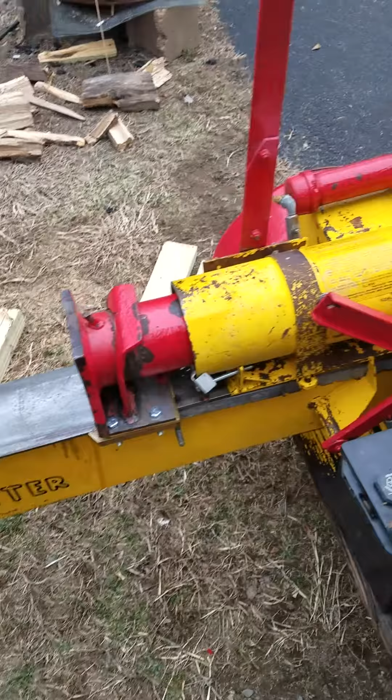A little bit of history. I bought mine 15 years ago from my uncle's best friend who passed away. His wife sold it to me for 50 bucks. We couldn't get it running at her house. I brought it home, it had a cracked spark plug. Put a new plug in, she started right up.

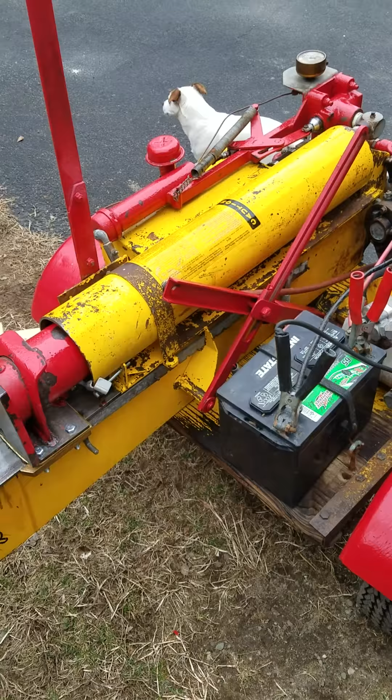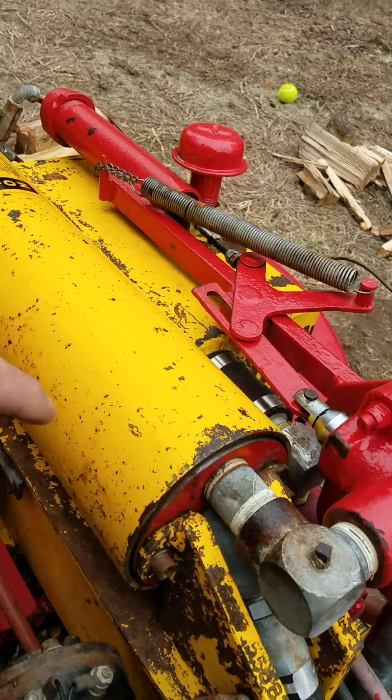Just a few things right off the bat. If you own one of these, take care of it. I started watching videos and Googling about this because I had these two guide bolts break, which in turn pushed my piston to the side and blew out the back O-ring right here. I had to make up new brackets and figure it all out and get it back together. But do your regular maintenance, take care of it. This ain't no throwaway splitter like you buy at Lowe's and Home Depot, use for a year or two and then throw away and buy something new.

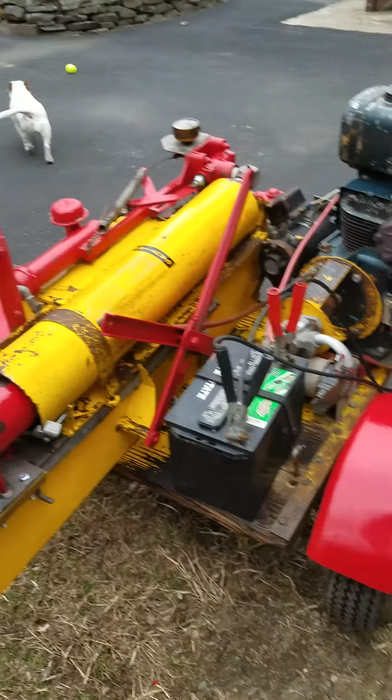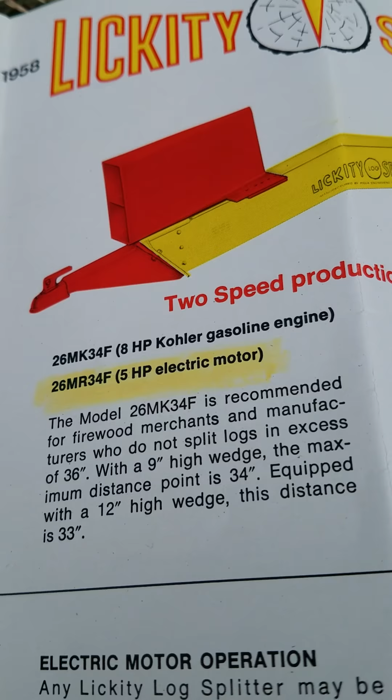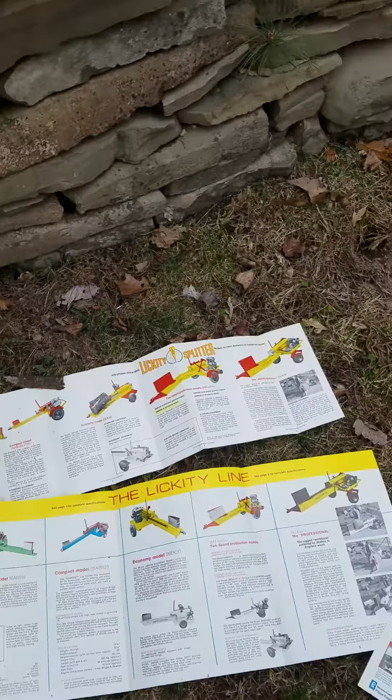This thing is from 1958. Mine, the badge on it says 26MR34F, with an electric motor. The guy I got it from, I knew him. He was a gearhead, grease monkey, he would never buy nothing electric. So why the badge says what it says, I don't know. But it should be MK34F, because that is the original Kohler motor.

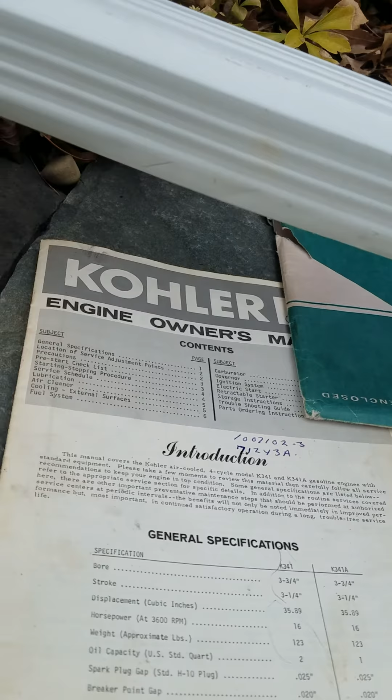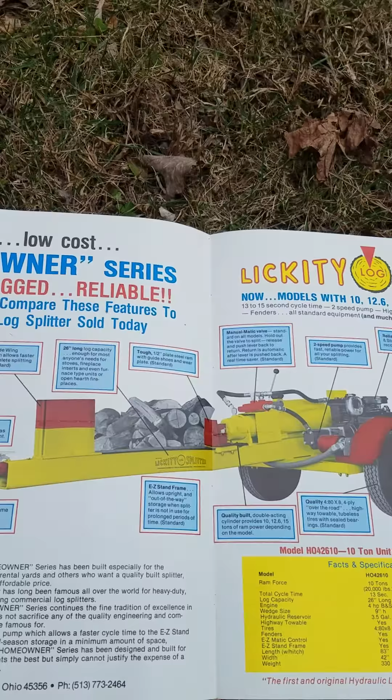I have all the paperwork the lady gave me, with the original Kohler owner's manuals. I got a ton of literature. American pickers would kill for this stuff - all vibrant colors of all the different splitters, with descriptions of them all.

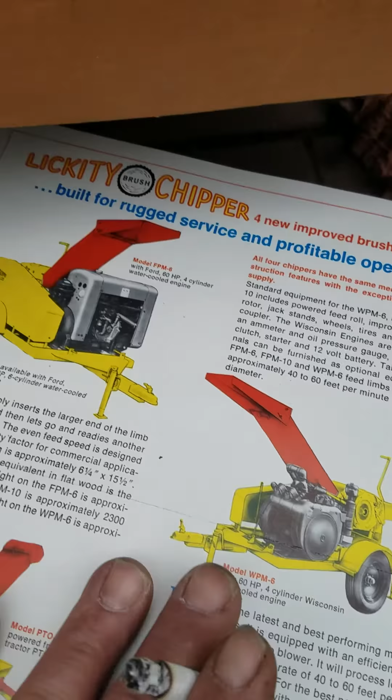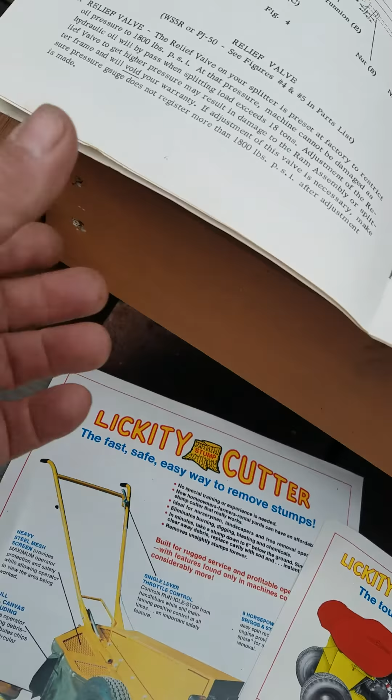Lickity also made other things such as chippers, chipsters they called them, and cutters. I also got manuals with it, tells you everything you need to know.

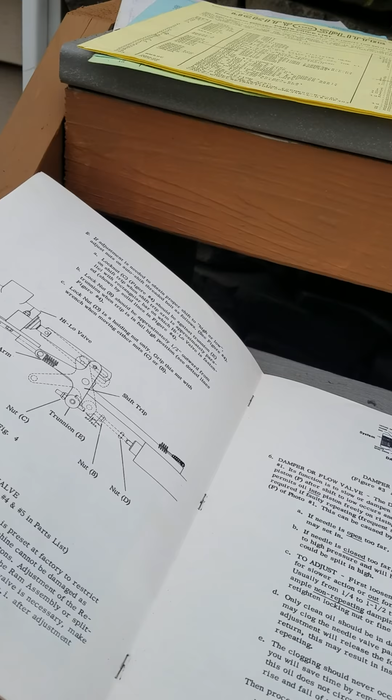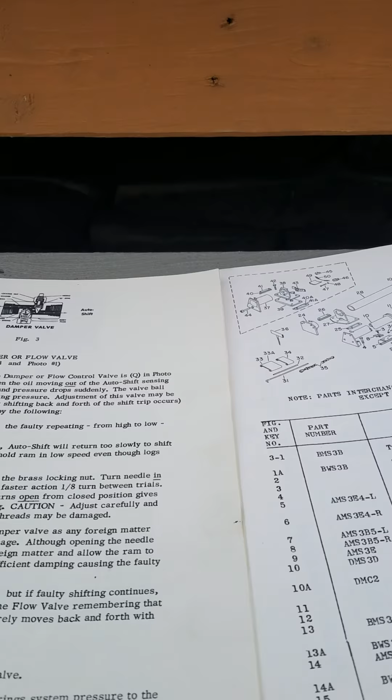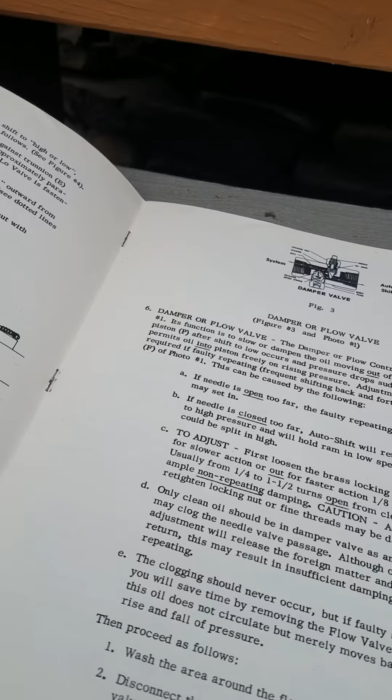I've been watching videos a lot from a guy, Dan O'Connor, who does a lot of great things with this, gives a lot of good information. In one of his videos he was talking about hydraulics and the high-low valve. But there's also more to that with your damper valves, and I'll go through that. There's also some things I'm going to show you about auto shift.

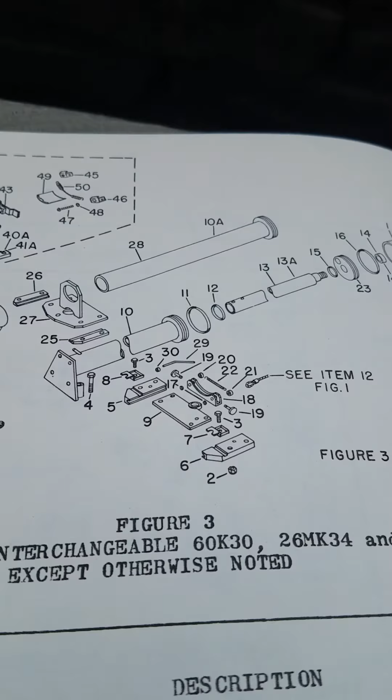I got all these magazines out. It breaks down your pistons, gives you the part numbers. I'll just flip a page here and show you some other things. There's an electric motor, there's a Kohler motor.

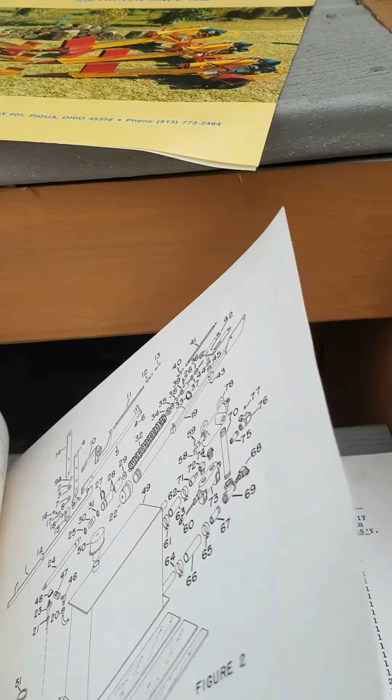All this literature is worth its weight in gold, it's helped me out quite a bit. Breakdowns of the lever action. I got a part price list from 1978, and an updated one from 1983 I believe. But this is definitely worth its weight in gold.

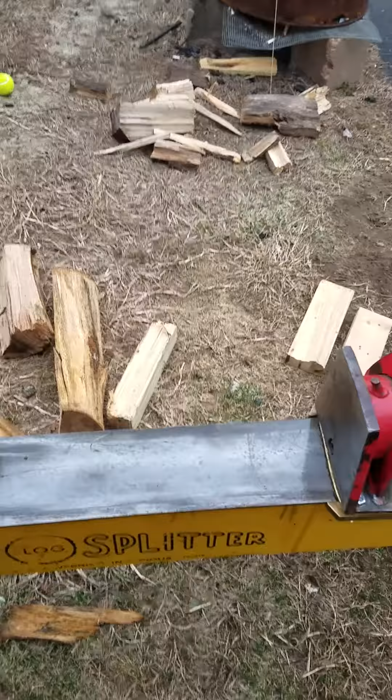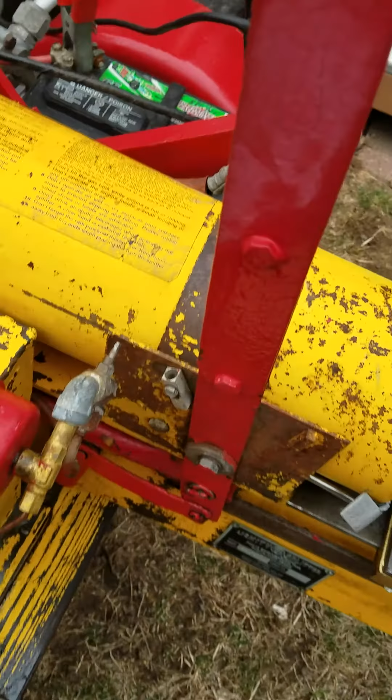The videos I watch don't talk much about this - I've never seen anybody explain the X lever here, the auto shift, which is on the other side, which mine's not working at the moment but I'll explain that to you, and the high-low valve.

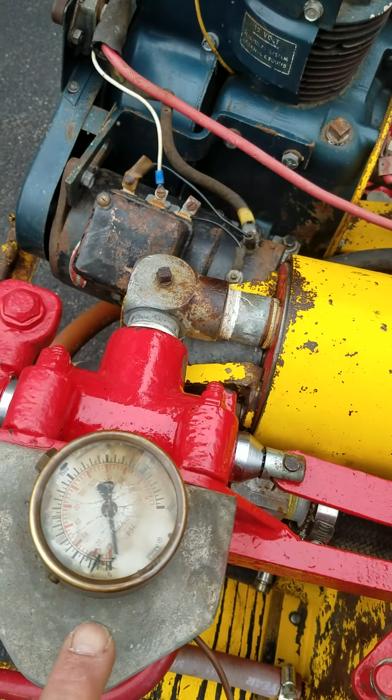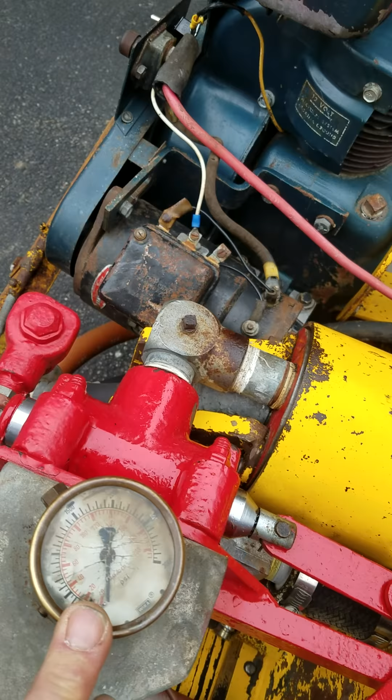Now in Dan O'Connor's video talking about hydraulics, he thought his gauge wasn't in the original spot. It is, it's mounted back here, not up front here. Now with this gauge, when this log splitter hits 1,700 pounds, that ram will pulse - poof, poof, poof, poof - to split things.

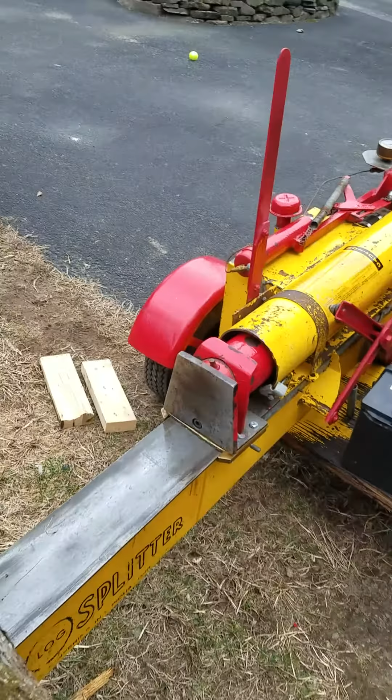It's very hard to get it to 1,700 pounds. I'm going to take this piece of maple log that's 6 to 8 inches in diameter and cut it cross grain to see if it will pulse for you. I've had it happen a couple times on some real knotty oak, but it's very rare that it does the pulse. So I'll go over a couple things.

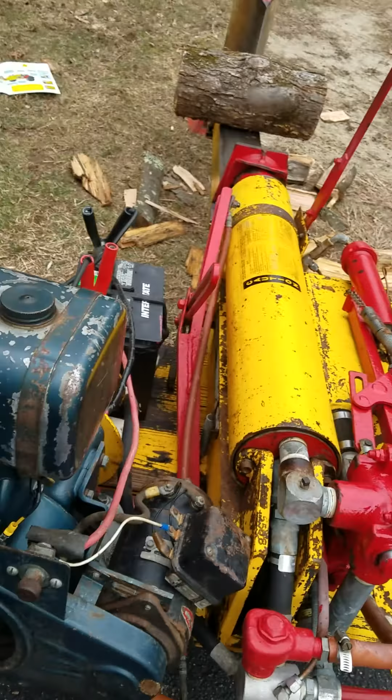And Dan, if you get this, I'd like you to get in touch with me some way. I saw some of your other videos about Lionel trains, and when my uncle passed away I inherited a bunch. I'd love to pick your brain on it and see if you're interested in any.

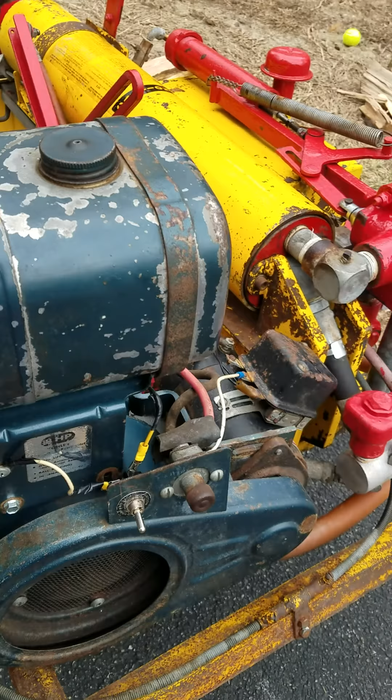But anyway, back to the log splitter. She starts right up. My battery's going dead, so that's why I got the jumper cables on it. Starts right up. I noticed in some of the videos that Dan O'Connor did, he had his engine revving really high. I never do, there's no need for it. It just sits here at an idle, that's all you need for this.

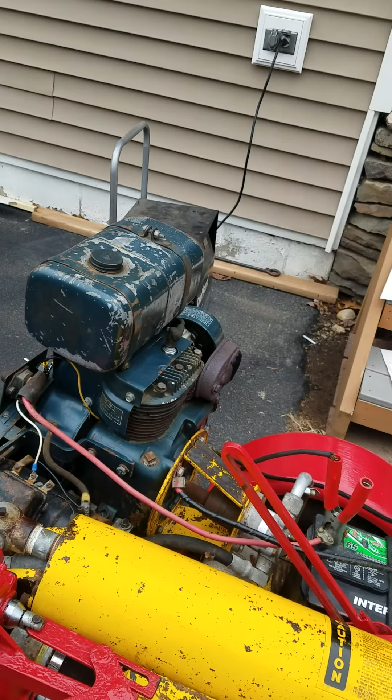Like I said, this ain't no throwaway splitter, this thing was built to last. If you have an opportunity to buy one of these, mortgage your house and buy it, especially if you're into splitting wood. If you own one of these, do not sell it.

So what I'm going to try and show you now is the pulse action. Again, I don't know if it's going to do it, but this is an 8-inch maple log, cross grain.

Because we're at the max, the ram will go, so I'm going to put a spacer in there.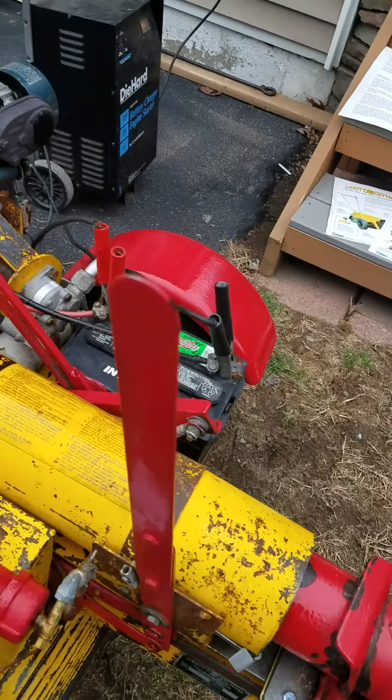It still didn't get up to 1700, I was watching the gauge. But if it was there, you saw what it just did to that log cross grain. Anyway, if it got up to 1750 PSI, it would start to pulse, and I believe that's what's in auto shift. I'd have to reread this.

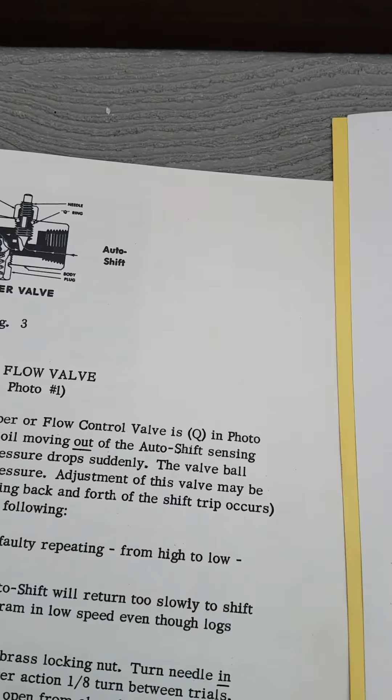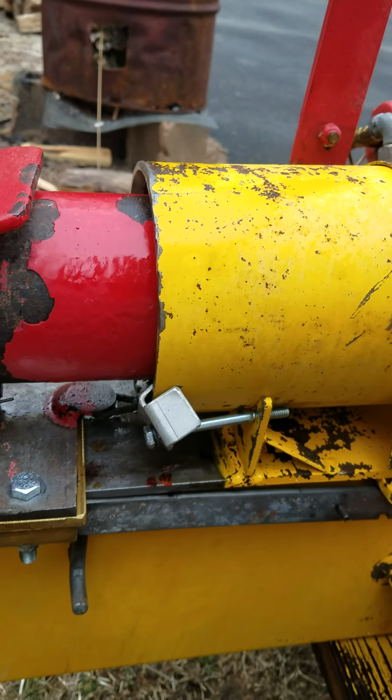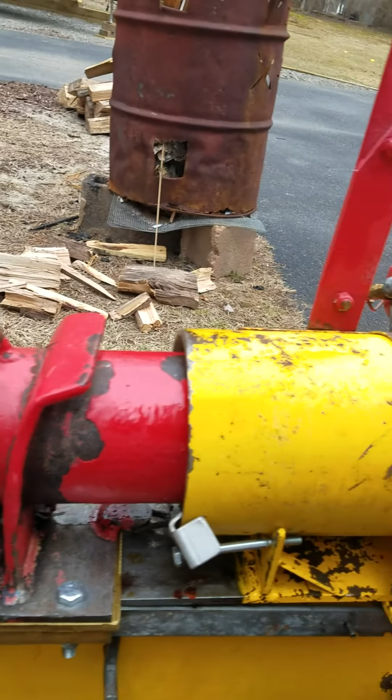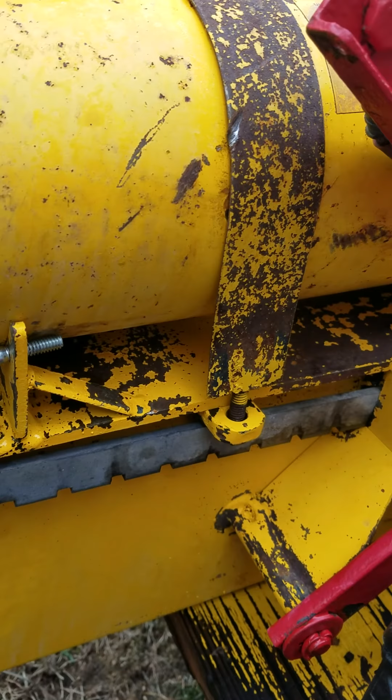Anyway, so one of the features of mine, which I didn't see on any videos on YouTube, notice where the red is right here. Right now I can split a log up to 30 inches long. If I only had 18-inch logs, I'd send my lever forward and take this rod and just move it up. It's got notches there, that stops my piston right there, so it don't have to travel all the way back. Waste of time. They didn't want to waste no time back in the day.

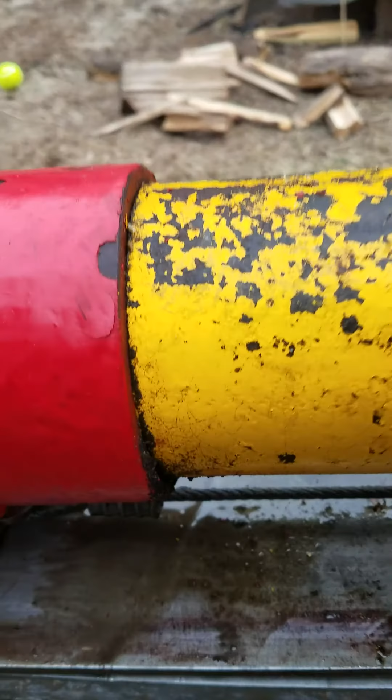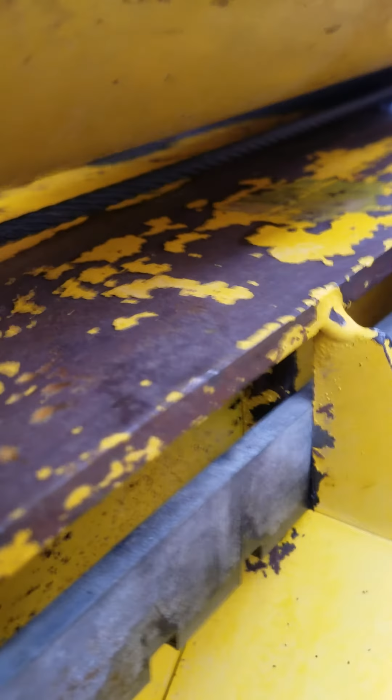Also, since I'm right here, some of the videos, people are worried about oil seepage down in here. It's supposed to do that. You look down in there, it's hard to see, but there's a hole, you can just see it. Oil's supposed to drip through that hole, it's self-oiling. And oil the return spring cable that goes all the way back. You also want to split wood with your log splitter pointing down because that oil keeps your ram lubricated.

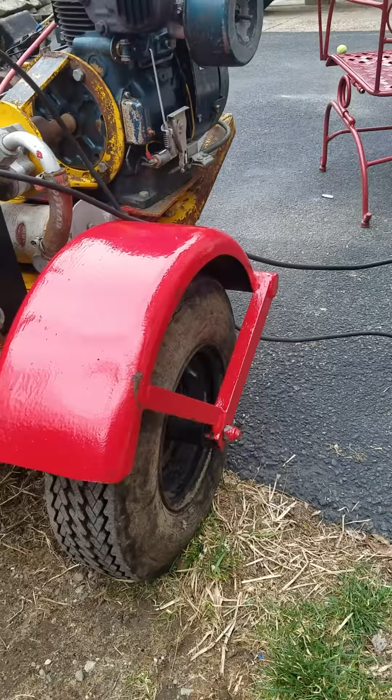So now I'm going to push this lever all the way back, so my ram comes all the way back, so I can show you the next feature of my splitter. The X cable, the X there. Notice the fenders, I'm ready for towing. I can tow it down the road. I got a good 1.5 of ground clearance.

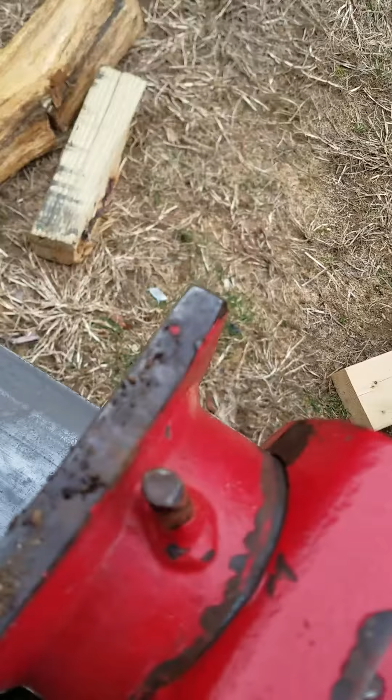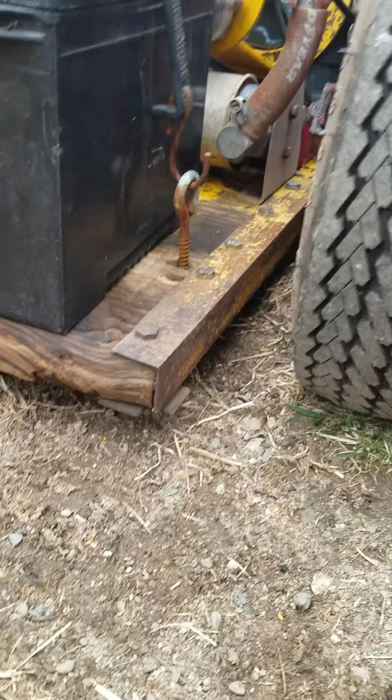Now, this X has a cable attached to it with a loop on the end. On your ram head, there's a hook. You attach that cable to that hook, you send it forward. Fenders down, look at my ground clearance, right to the ground. It's made for rolling big logs on so you don't have to lift them up.

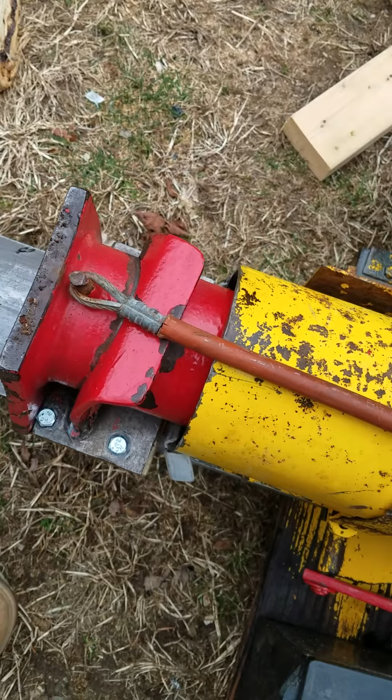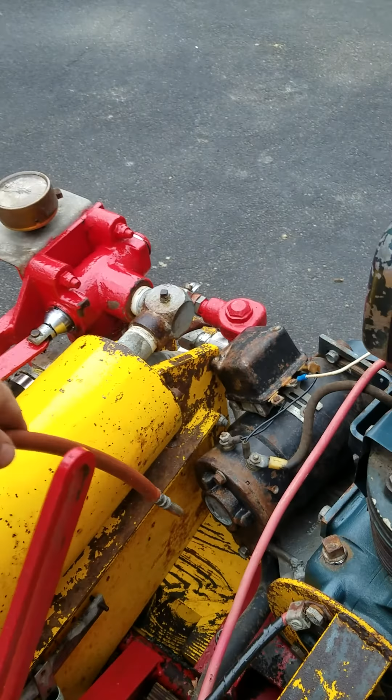When you're done with the big logs, you reattach your cable. Right now I can take it off if I want to and start splitting. Reattach your cable, send it forward. It brings the wheel wells right back up, locks back into place. Remove your cable, either start splitting or travel down the road to the next job.

Now my splitter also came with the original Kohler motor, electric start, generator/starter. I mean, I got a shit battery on there, so that's why I got the cables on it. Excuse me.

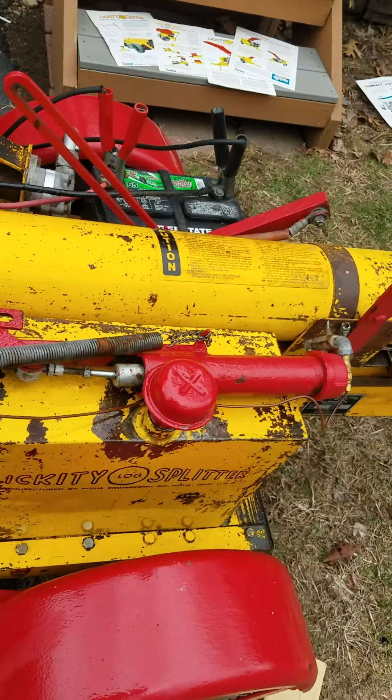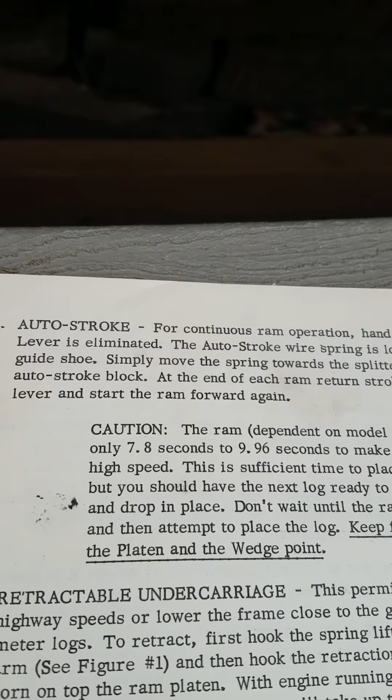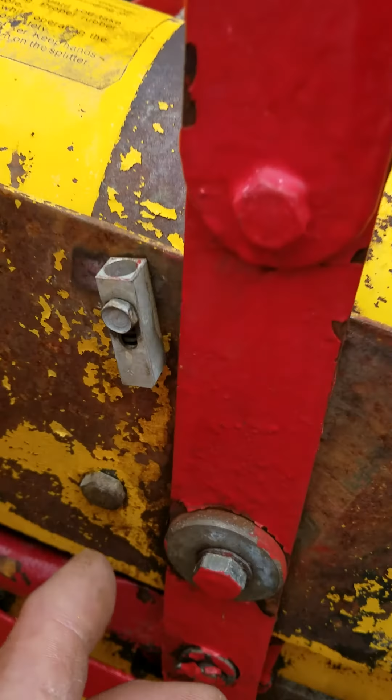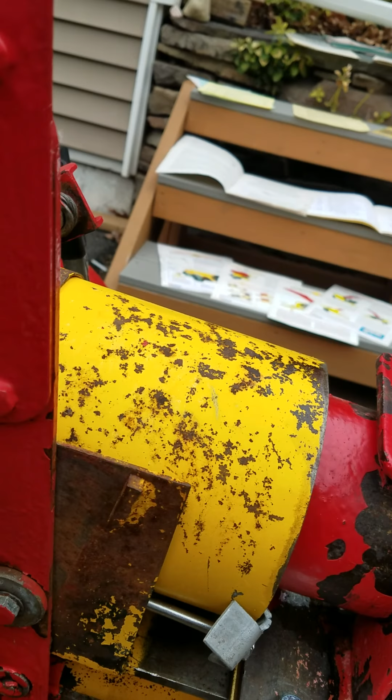And now another thing I want to show you, like the book shows here, auto stroke. Now I'll pan back if anybody wants to pause this and read it. But what that is, it's a simple little shoe here with a spring in it. Now my spring is worn, so that's why it don't work. I'm going to replace that this week. But all you need to do is push that forward.

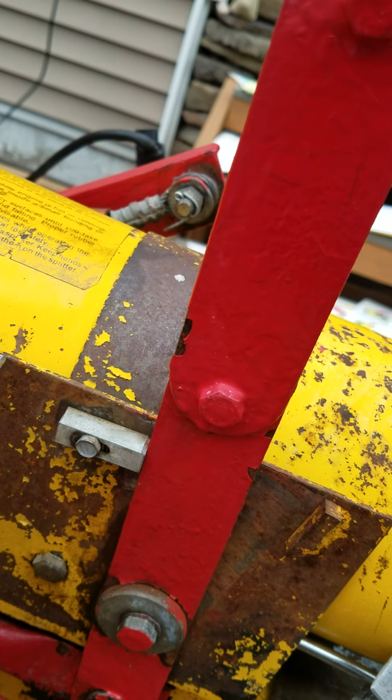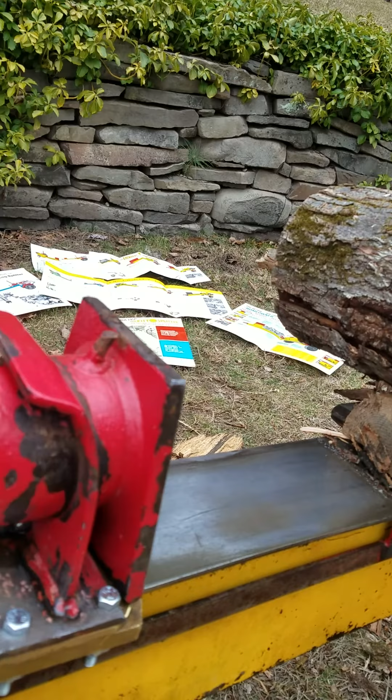Turn that to auto stroke. Now when it comes back, if it was working properly, what that would do is keep this bar forward, so it would never stop running back and forth. So when it comes back, you could be putting another log on there and it'd be coming right back to split again. Again, no waste of time. No one liked to waste time back in the day. You made hay when the sun shined, you had to do it quick and fast.

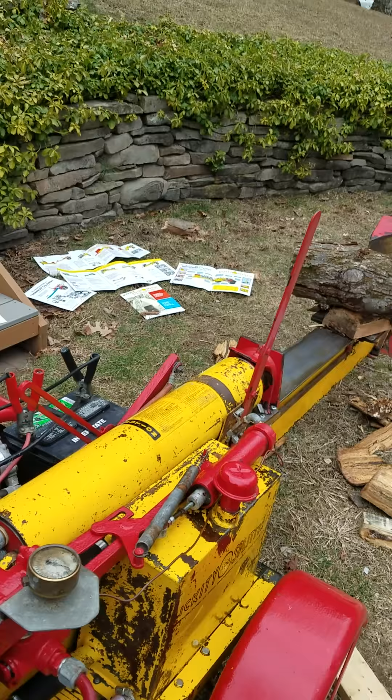But my splitter's all original. Like I said, if you have one of these, don't sell it. If you have the opportunity to buy one, buy it. It's worth its weight in gold. Any questions, try and get in touch with me, hopefully I have some answers for you. Loving the Lickity log splitter. Peace out.